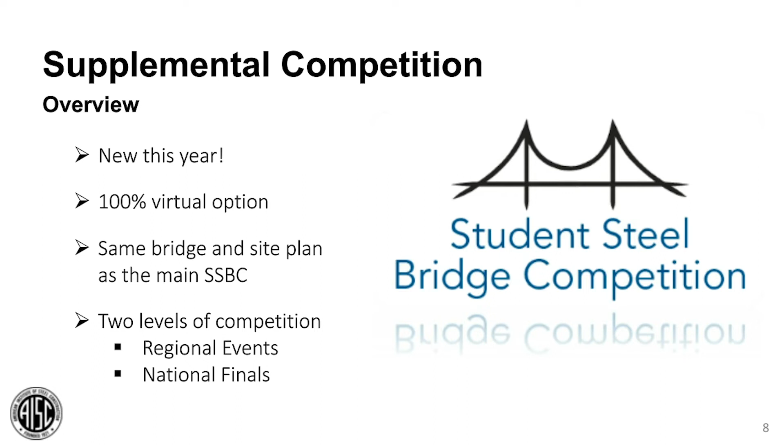I want to remind you and your team that you will need to pre-register by Friday, October 30th. Your team's faculty advisor can visit aisc.org/SSBC to fill out the pre-registration form.

Both sets of rules for the main competition and the supplemental competition are located on the same page at the aisc.org/SSBC website. This is also where you will find the official clarifications. If you do have a question for the Rules Committee, you will find a link on the right-hand side of the page to submit your question. The Rules Committee will provide a response that will be added to the clarifications for other teams to see as well.

As I mentioned before, the supplemental competition is a 100% virtual event, and teams are challenged to design a scale model steel bridge. You will be asked to develop a portfolio that will be judged by industry professionals, steel construction specialists, and members of academia. That portfolio will include a written report as well as a video, and together, those should show how your team's bridge design meets the client specifications and optimizes performance and economy.

There are 4 separate judging categories: the design portion, analysis portion, construction sequencing portion, and a video. We will take a brief look at these 4 categories, but I encourage you to read the rules in detail for all of the requirements.

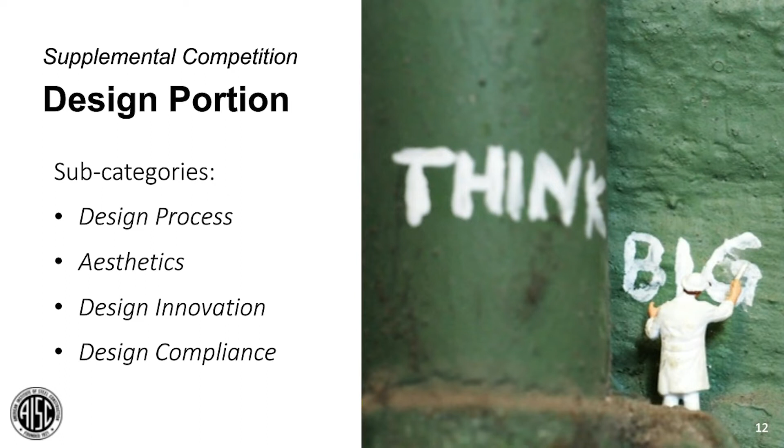First, the design of the bridge focuses on the objectives and constraints associated with the bridge's geometry, fabrication, and construction. A good design efficiently uses material, considers ease of fabrication and construction, and allows the structure to function properly under the expected loads. When reviewing potential options, aesthetics and innovation can also play a significant role. The design portion includes a description of the final design process and the principles used to select the final configuration. It should include things like the advantages and disadvantages of the selected overall design, an overview of any innovative features, and a discussion of the aesthetic appeal.

Structural analysis methods and software packages allow engineers and SSBC teams to predict the performance of their structures. However, in order for the analysis results to be useful, several engineering skills are required, including proper modeling techniques and assumptions, proper demands, consideration of things like geometric imperfections, structural stability, and loading sequence, and the ability to verify the results generated by a computer analysis.

So the analysis portion requires you to describe the analysis methods that you used, discuss the perceived limitations of the analysis, and provide a summary of the results.

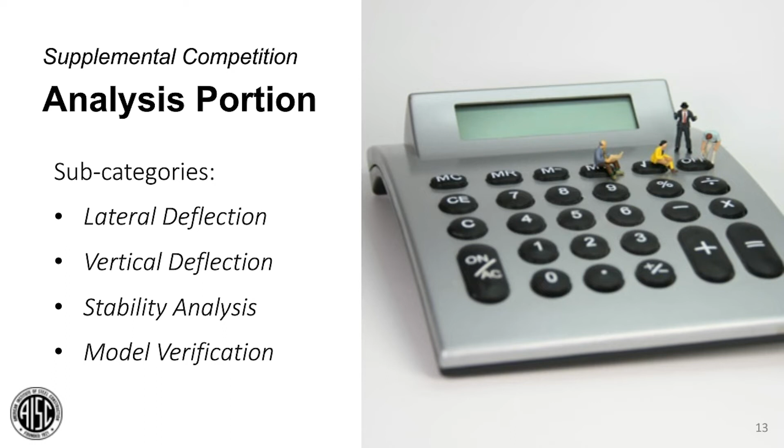Thinking about how a structure is constructed can be just as important as making sure that it can carry the loads. As designers develop their final design, they should consider the erection process and how things are put together. The construction sequencing portion should contain a description of the final construction sequence, as well as a description of the methods used to decide that final sequence.

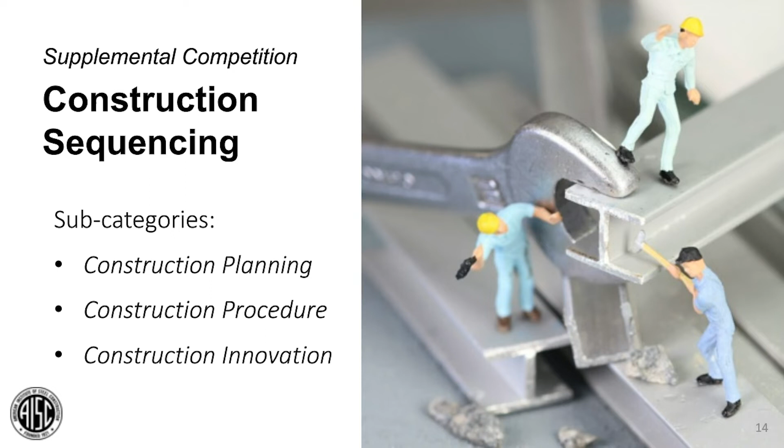And finally, the results of your final design, analysis, and construction sequence won't go very far unless you can communicate that information to your client. It is really important to be able to convey that final design to a client in such a way that is professional, concise, and informative so that they can understand and accept the work.

The video portion of the supplemental competition challenges you to create a brief video that is directed toward the owner who will be selecting the final bridge. We will not discuss the video in detail during today's webinar.

So at this point, I'm going to turn things over to our three guest speakers who will share their own strategies when it comes to assembling engineering reports. And we'll start first with design.

At this point, I'd like to introduce Jason Stiff. He obtained a PhD in structural engineering from the University of Texas at Austin after receiving both Masters of Civil Engineering and Business Administration degrees from the University of Kentucky. He is a bridge technical manager working for Michael Baker International in their Louisville, Kentucky office. To date, he has made significant contributions to several major bridge projects touching every stage of a bridge's life cycle, including the design of two separate 550-foot basket-handled network tied arches over Kentucky Lake and Lake Barkley. He has worked with the AASHTO NSBA collaboration, where he is the vice chair of the Steel Bridge Erection Task Group. Jason has assisted in numerous complex, long-span fracture-critical inspections, including more than a half dozen Ohio River bridges, and he has also been involved professionally with the development of a national standard for steel bridge design and analysis. He was awarded the 2016 National Society of Professional Engineers Young Engineer of the Year Award. Jason lives in Rineyville, Kentucky, with his wife Samantha and their 6 children.

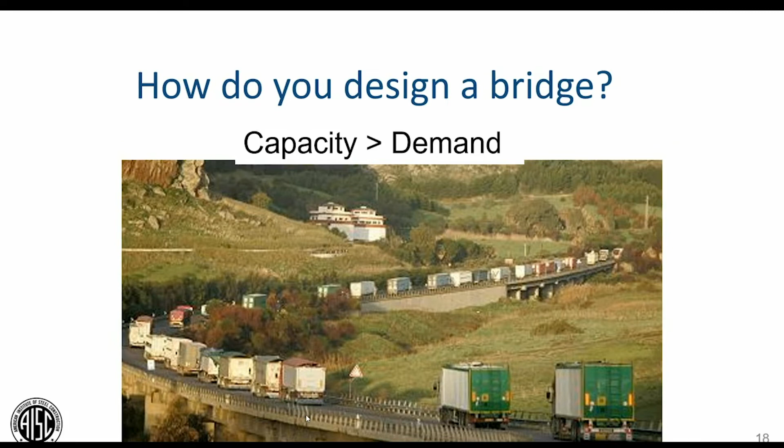So let's talk about designing bridges, and generally let's talk about design in general. For those of you who may be starting into this, design is quite simple, and it really doesn't matter whether it's a bridge design, highway, water, electrical, mechanical, anything. The simplest equation when it gets down to design, and really the only thing that gets down to design, is this very simple equation: the capacity has to be greater than the demands. So we're going to look at this equation of capacity and demands, but it really boils down to that simple. No matter what you do in engineering and in design, it has to come down to this very simple equation, and we'll write it in complicated ways and look at it different ways, but it basically boils down to this: the capacity of any member has to be greater than the demands that we're going to put on that member in order for it to be safe for the public.

I just want to make sure we have those terminologies in case it's used now or in your future. You've hopefully seen that terminology. So let's get back to designing a bridge.

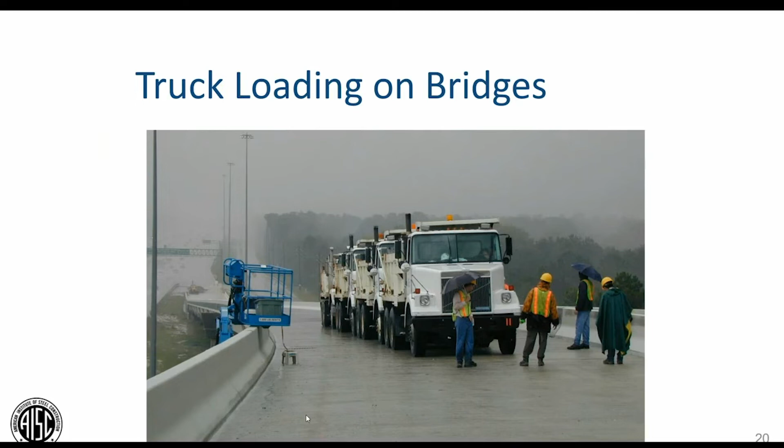For most of our highway designs and highway bridges, the things that matter are trucks. Trucks load up a bridge, and their weight has to be supported over top of a river, over top of another road, a railroad, or whatever obstacle we're trying to cross. Cars in general are light and relatively insignificant, so we can completely focus the design on a truck typically. For the steel bridge competition, they made it a little easier - you have a set steel weight and load that have to be handled. But no matter how you do it, you still have to get the loads from the point of application to the support.

That's called a load path, and you have to understand the load path of your bridge in order to design it. For our normal steel bridge design, we would design the deck in order to support the truck wheel weights, and the deck spans between the girders. Then, knowing the weight of the truck and the deck, I need to design the girders to support the weight of the truck and the deck above them. Then you go to the piers, which span and support the girders between them - you design those to support the truck, the deck, and the girders, plus their own weight. Finally, that has to get down to your foundations, which you design to support the truck, the deck, the girders, and the piers.

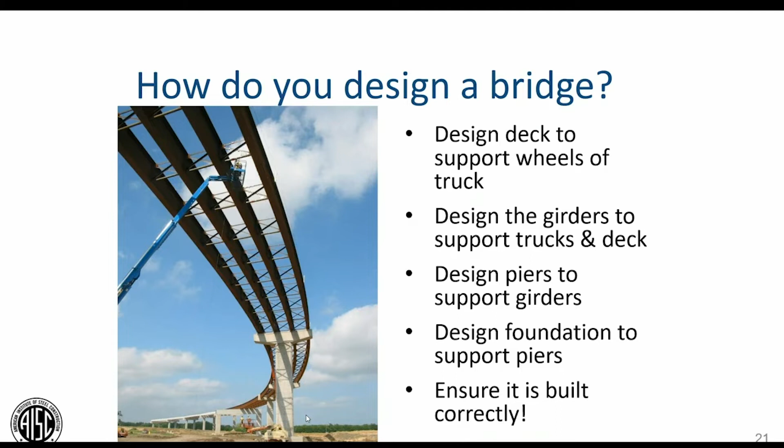So there's a load path that you follow from the point of application of the load through your structure to the point at which it hits your supports. And then, of course, finally you have to make sure it's built correctly. But this idea of load path is critical as you think through your structure and how you're going to support that load most efficiently and get it from its application to the supports.

So back to this equation, an equation of capacity versus demand. For every member, as you go through this load path, we've got to ensure that the capacity of that member is greater than the demands placed on it by the loads.

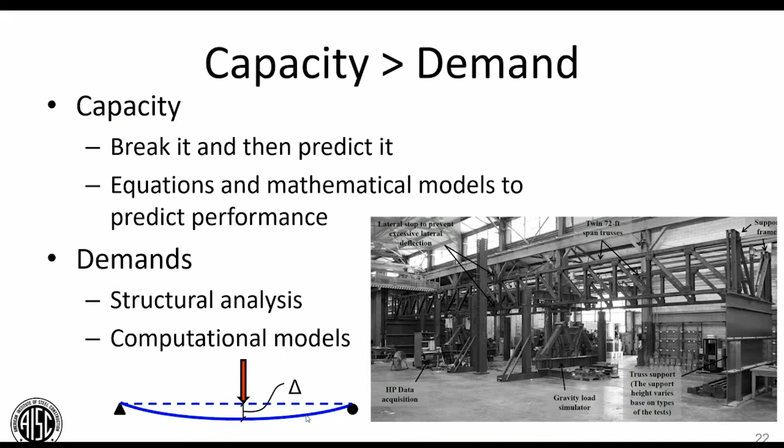The demand side of the equation is generally done by structural analysis, computational modeling, and that sort of thing. That section is what Christine is going to talk about right after me, but it follows along with it - they're two parts of the same coin. You have to know your capacities, you have to know your demands. So when I'm talking about capacity and design, I'm going to speak more toward the design side and capacity side of the equation, while Christine will be talking about the demands you apply to the structure.

As you go through, the most important thing to understand and think about - it's kind of a state of mind, because really it's code independent - whichever code you're using, they're all trying to check the failure modes. How can this structure fail? What are the ways in which it can fail? It could fail in tension or compression when it yields. If it's in tension, it could fracture. For compression, there's stability - this thing could buckle, like this bridge in New York did several years ago during construction. So if you know the failure modes, only one of these is going to control, because you may have a very high capacity for tension but a very low capacity for compression.

So obviously the compression one is what's controlled because of the lowest capacity. That's your controlling capacity in your capacity demand equation. So you have to figure out all the different failure modes. Whatever the least is becomes the capacity of that member, and we need to ensure that is greater than every demand.

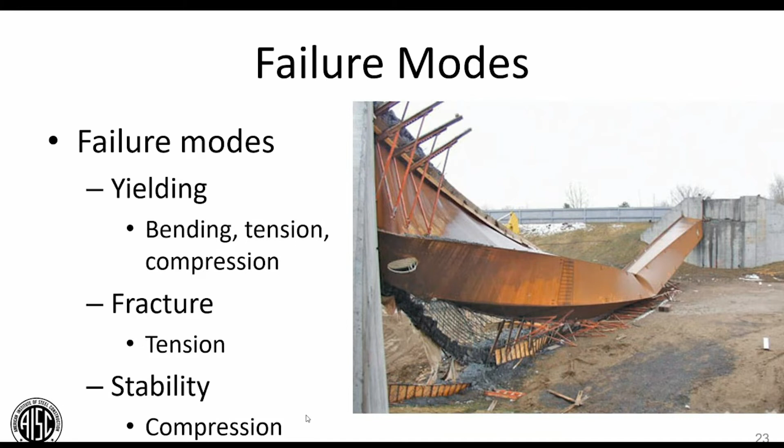Where can you get some of the information? Hopefully you'll have an opportunity to look in the AASHTO, the American Association of State Highway and Transportation Officials, LRFD Bridge Design Specification. It's really, I call it the Bible. It's the main book that we have to use within our bridge world. This has all of our requirements.

Like many of the codes you may see, it's a two-column code. There's a left column and a right column. The left column has the requirements. As you read it, you will see you shall do this, you shall do that, and it's written as the requirements of the code.

The right column is directly related to what is in the left column, and it's commentary. It recommends that you do this, you should do this. It gives you some, maybe historically we have done this, and some background and more ideas. It gives you references to other research and places you can find information to try to help inform your decision as to how you apply the code. And that's the way that works.

For our competition and for this, typically there are 3 chapters that are important. Chapter 3 is all about the loads, applying loads, and how you apply loads in bridges. Chapter 4 is about analysis, the analysis of bridges and the different types of analysis that can and should be done. And finally, Chapter 6 is the steel design, or the steel capacity equations, where you can figure out how to design members for different failure modes, and you work your way through that.

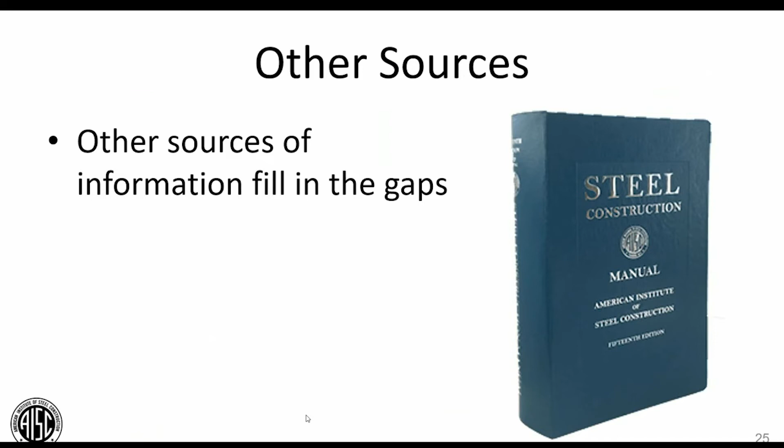Now, the AASHTO, or any code, is not all-inclusive. It's often important that you go to other sources to fill in the gap, such as the AISC steel manual. Even though it's not specific to bridges, it's still very useful and has a lot of good information that's worth dealing with and trying to capture.

Another really important aspect, and I think this will become important as you go through this process, is that everyone makes mistakes, and as you do this, you're going to make mistakes. Typically in school, as you do homework or an assignment, the teacher, your professor, is the one that actually does the grading. But once you get a job in life, your peers become your graders. So whenever I do a set of calculations, one of my coworkers will go through and check to make sure I haven't made a mistake. The consequences of failures in structures is too great to not do something like this.

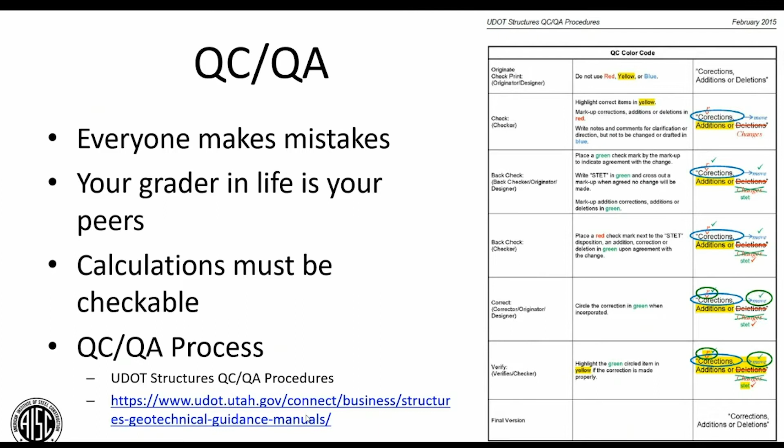It also means that as you do a set of calculations, you need to make them checkable. You need to write down the code reference: this is where I got this equation, this is how I'm doing it. All that kind of information becomes very helpful and useful as you go through there.

Some advice as far as writing it: typically, assumptions are really the most important things. You're going to have examples of your calculations as part of your appendices and things, but what are your assumptions? If somebody else comes up later, your coworkers or your grader, somebody picks this report up, can they understand what you did? What are the assumptions you made with regard to the geometry, the materials, what kind of materials you're planning to use, the loading, your design approach, your methodology? You need to make sure these are clearly spelled out within your report, so that someone coming along after you understands, oh, that's why they did this, this is how they got to this answer, they were assuming that. That's an important aspect of it.

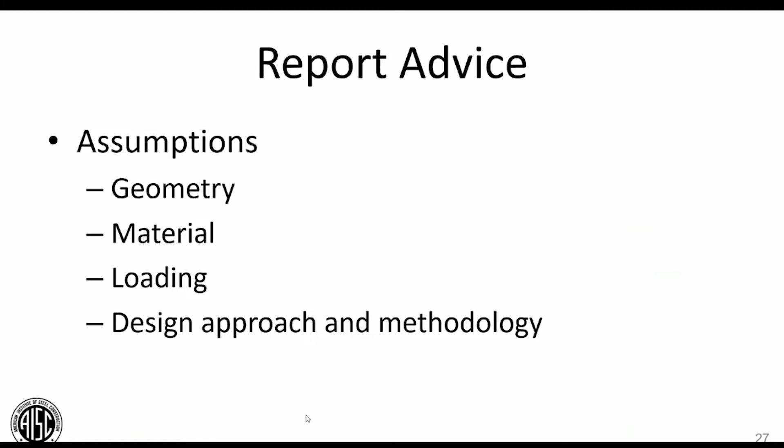They will see the effort you put in there and understand that you're trying to tell a story. In a set of calculations and in a design report, we often put pictures of the detail, put pictures of what we're trying to do, hand drawing showing the orientation of the forces, something like this, but something to explain what your ideas are. Oftentimes pictures and call-out boxes can catch the eye of the person checking it or reading it more than just straight text.

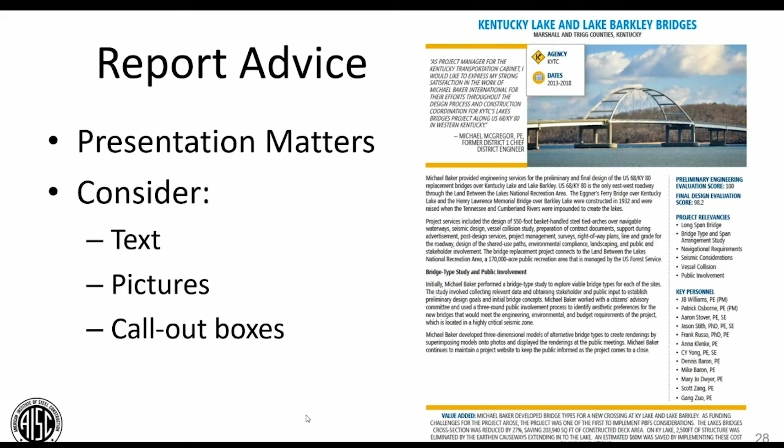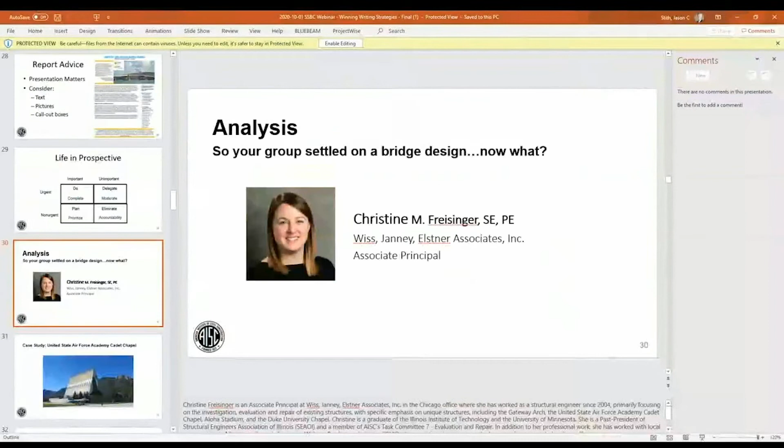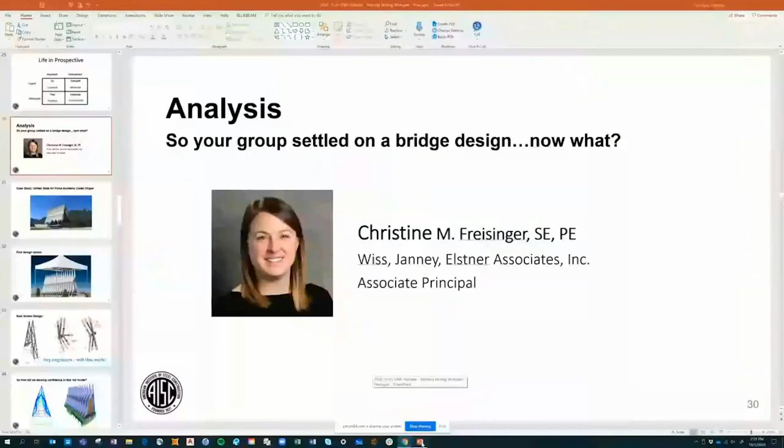All right, so while Chris gets her screen set up, we'll give her an introduction. Christine Freisinger is an associate principal at Wiss, Janney, Elstner Associates in the Chicago office, where she has worked as a structural engineer since 2004, primarily focusing on the investigation, evaluation, and repair of existing structures, with specific emphasis on unique structures, including the Gateway Arch, the United States Air Force Academy Cadet Chapel, Aloha Stadium, and the Duke University Chapel. Christine is a graduate of the Illinois Institute of Technology and the University of Minnesota. She is a past president of the Structural Engineers Association of Illinois, or SEAOI, and a member of AISC's Task Committee 7 for Evaluation and Repair. In addition to her professional work, she has worked with local communities in Nicaragua through Engineers Without Borders. And during COVID, she spent time learning to make homemade pasta and play disc golf.

So at this point, I'll pass it to Chris to talk about the analysis portion of the project.

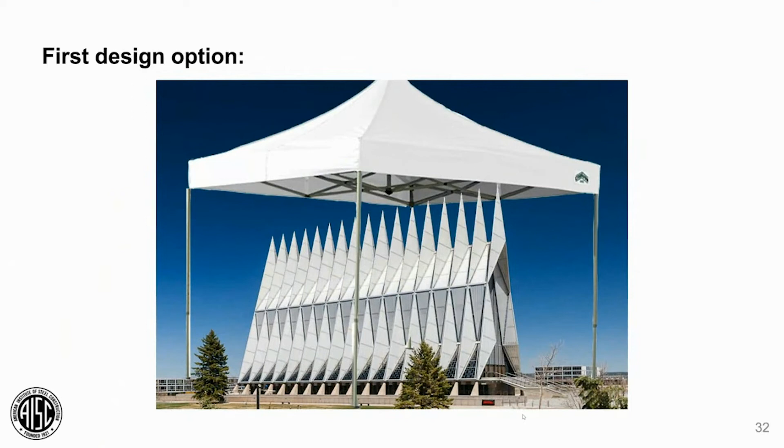So our first design proposed just to take away the water source. After a good laugh, we moved on to our second design option, which was designing a new rain screen with aluminum metal panels and new detailing between the joints that could hopefully perform better over time.

This proposed system ended up adding about 25% more dead load to the structure. So the architectural side of our design team wanted to know: will the existing structural steel be able to support the additional proposed loads, and what magnitude of deflections should we design the joints for?

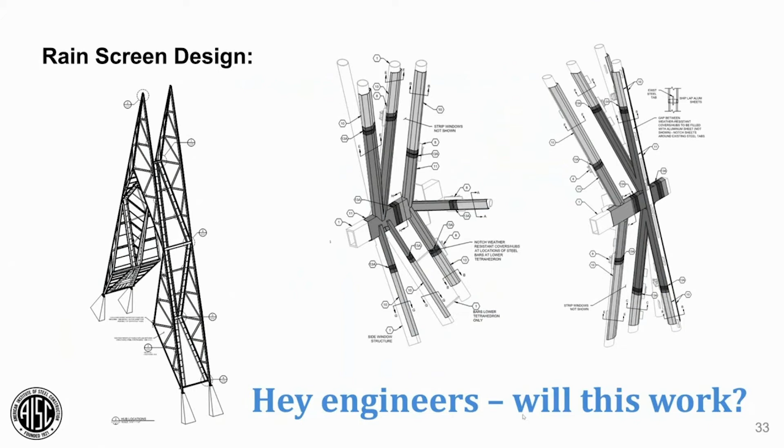So we can certainly build really cool and complex models in a variety of analytical software programs. They can check the numbers, they can get out deflections, and we can tell the rest of the team the answers that we've received.

And then if you're working in a team atmosphere, often the rest of the team says something like, 'Are you sure? Did we have this analysis reviewed internally? And is the calculation package ready to go to the independent peer reviewer?' Which, as Jason mentioned, you often have peers or colleagues reviewing your work as part of these design processes.

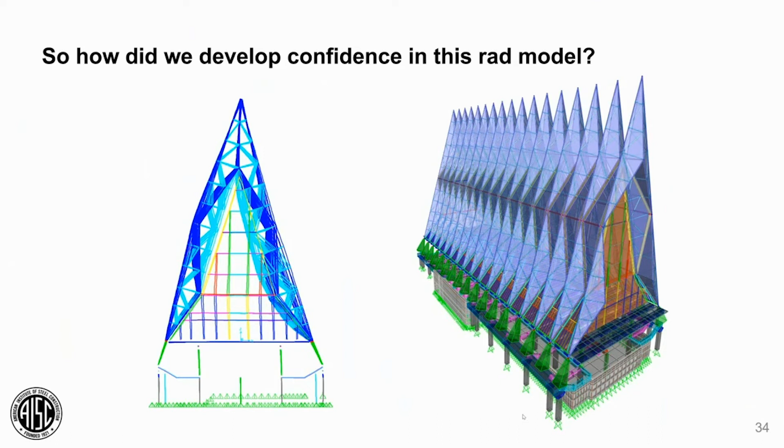So how can we take this really cool, complex model and distill the analysis down to a step-by-step process for another engineer to review, understand, and then discuss any conflicts in our base modeling assumptions, inputs, and outputs? Essentially, how can you convince the team that your analysis is sound?

So before you start modeling, there's a few things you want to keep in mind. As an analyst, it's your job to ensure that your mathematical model is realistic. It's entirely possible that you've built a valid model that runs, but the model doesn't correctly represent the structural behavior that you were trying to model. So the model doesn't need to look like the structure exactly, but it has to behave like the structure.

Oftentimes we're using post-analysis confirmation of the analysis results, and you're putting a lot of engineering judgment and critical thinking into looking at the results that your program is giving you, and deciding if that's the behavior you think you would be getting in real life or not.

So often a phrase to capture all of this that you may have heard already is garbage in, garbage out. So to convince yourself that the analysis is sound, and then to document the analysis, you need to make sure you understand the basic behavior of the structure that you're looking at. And we often break down unique structures into simplified models when we get started.

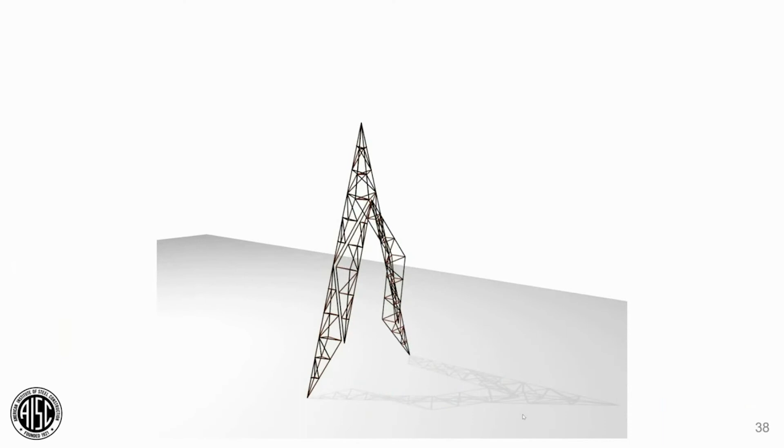So for Cadet Chapel, we can start with the tetrahedrons that form the structure. And if we tilt up just one of them, you could even just model one of these tetrahedrons, which is really just a 3D truss, to take a look at the local behavior. And then you could put a bunch of them together, and then you could analyze one bent of the tetrahedrons if you wanted to, and then replicate those bents out to get the entire structure.

So now that you have a model that runs, what's the difference between design and analysis? Design is what Jason was talking about - what does your structure or bridge look like? And then the analysis portion is what are the effects of the load on that structure, so how do you use your analytical model to calculate the demands on these members and get the deflections out?

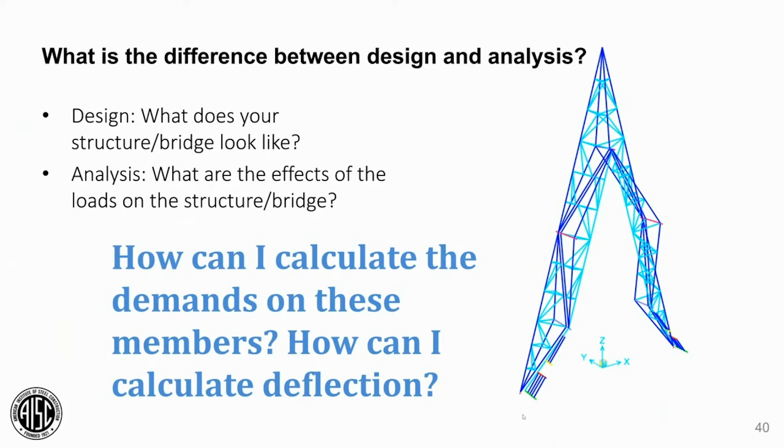As Christy mentioned, the analysis subcategory criteria includes a couple categories. When you're looking to answer these subcategory criteria, you want to be thinking really about how your model is behaving and how you're verifying that behavior, because those are the categories they're looking for. How are you confirming that your model is running accurately?

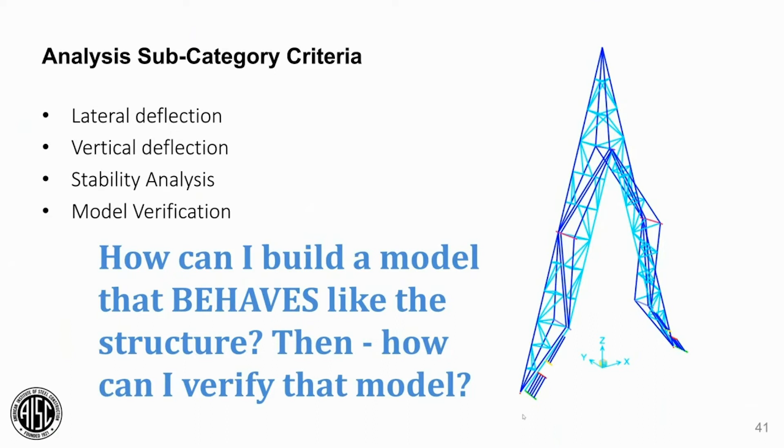So when you go through your model setup, a couple things to keep in mind when you get started are your overall model geometry. One tip is always to be checking your units. Usually these software programs can accept multiple units, and it's really easy to goof up a unit at the beginning and not understand the answers you're getting at the end. You also want to make sure you're giving some thought to your member sizes and material properties, as those will be important to estimate deflections.

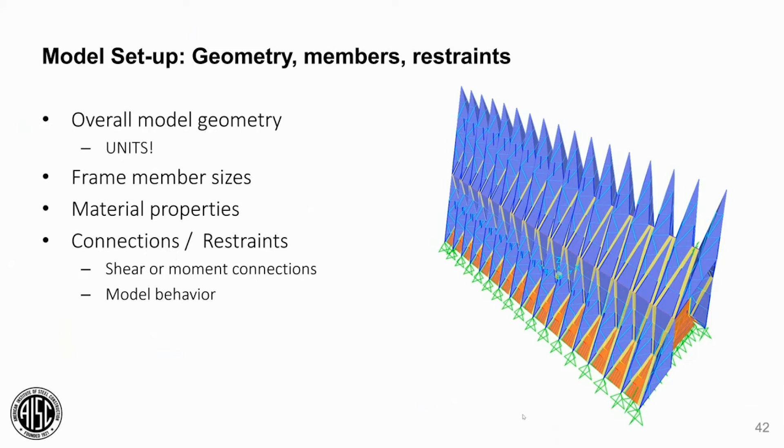And then give some thought to the behavior of your connections and restraints. You want to make sure you're providing enough restraint for the model to be stable, but an overly restrained model can give you poor results.

As you head into taking a look at your load cases and your load combinations, you want to be a little bit diligent about this. I often develop a matrix of loads and combinations in a simple Excel file before I get started. Sometimes if you elect to let the software program make the load combinations for you, there's often a lot of combinations, and it doesn't give you a good sense of which combinations may be controlling, especially if you're just looking at an envelope of the cases together.

And then you'll go on to usually checking your capacities. Most software programs are a really powerful tool that can calculate the capacity of the members for you. But to do this, the software often starts by making assumptions, such as unbraced length or interaction of loads. So it's prudent to be aware of those assumptions and update them when required for your behavior.

We also usually do hand checks of some of the highest stress members to confirm the software results. You can see in this overview of Cadet, we've got some members getting an interaction ratio of just about 1. So we would have taken the results of the analytical software and then also confirmed those by hand using the code checks to confirm what the model is outputting for us.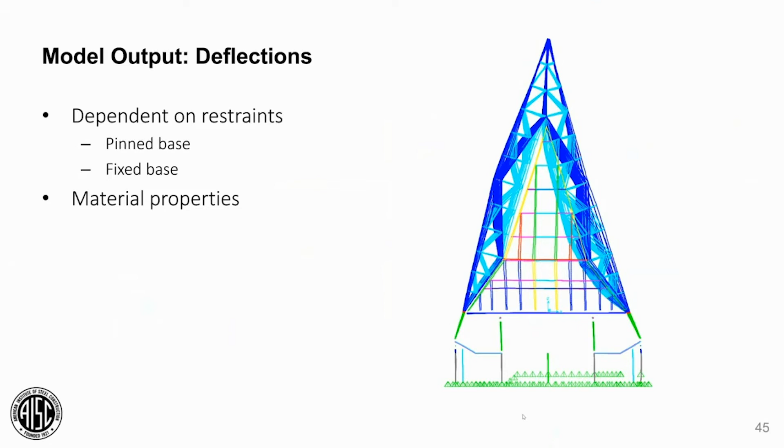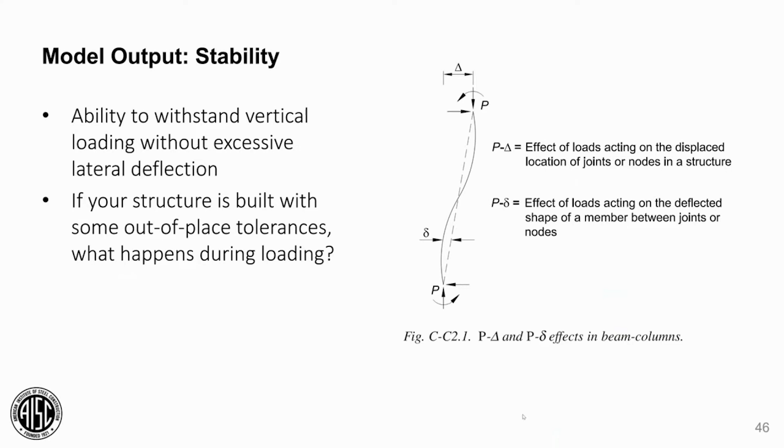Another thing to consider is the stability of your model. Many, but not all, modern commercial structural analysis programs are capable of accurately and directly modeling significant P big delta and P little delta second order effects. You want to make sure you understand how your software program is handling those effects and what is, and just as importantly, what is not included in that analysis and how you're verifying that for the programs. A lot of the software programs being used have verification examples, so you may want to check those to see how your software works and make sure those assumptions and runs are appropriate for the design you're working on.

As Jason touched on as well, there needs to be model verification completed. This is often referred to as a QC/QA program. A good program is a deliberate and systematic approach to reducing the risk of introducing errors and omissions into the design. The designer, the person making the model, often performs the quality control of his or her own work by establishing procedures for self-checking the work for accuracy. And then the reviewer is practicing QA, and they're responsible for independently checking the work of the designer to assure the correctness and meeting the design requirements and expectations of the project.

So it's usually a 2 or 3 step process. You're checking your own work, and then someone else on your team is checking that work and in more of a global view. And then in this case, the third reviewer is going to be the AISC team.

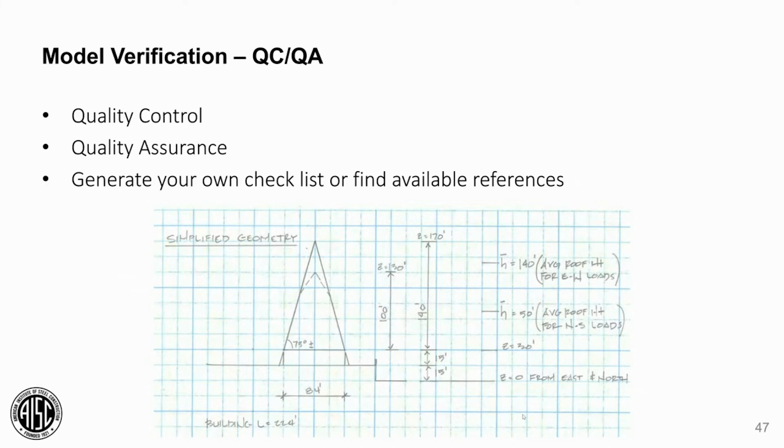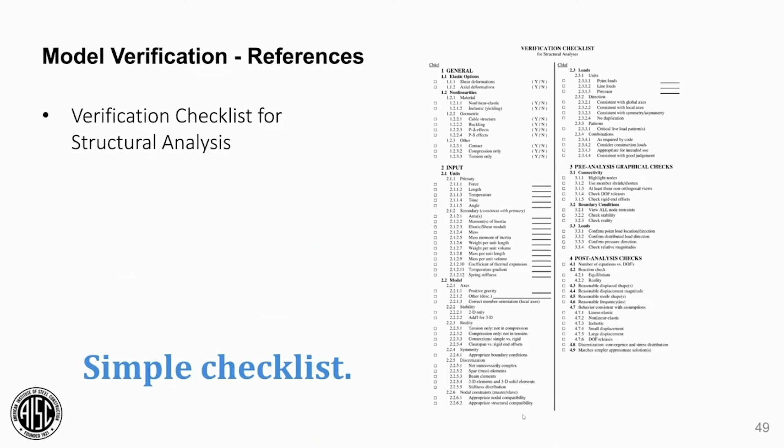You can also go to a more complicated checklist. This one gives an example of some inputs, modeling considerations, loads, and then also some post-analysis checks, which we talked about at the beginning.

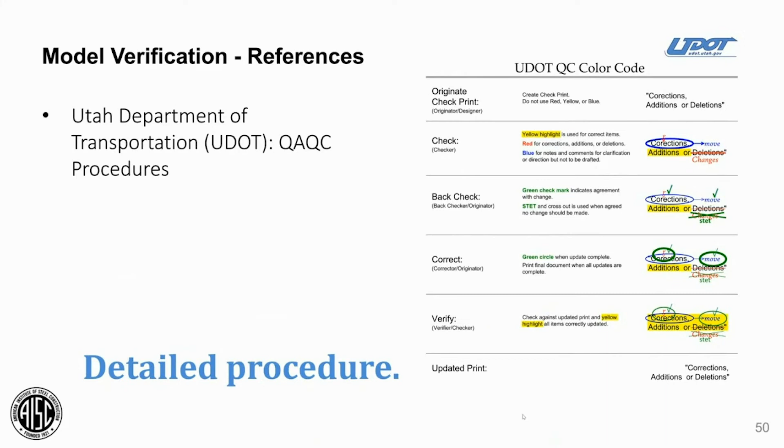Is your analysis giving you reasonable output, and is the behavior consistent with what you're looking at in real life? As Jason mentioned, you can go to a really detailed procedure, which is what the Utah Department of Transportation has on their website. So there's a wide variety of things you can do to verify your model.

When we're putting together model verification packages, we're usually looking at hand calculations that confirm the analysis input. So we're doing some quick hand checks to make sure we've got all the loads in the model correctly, and then we're doing hand calculations to confirm the overall structural behavior.

A couple slides ago, you saw some overall wind analysis on the structure. Your calculation submittal is really going to outline all of this together. We often put it together kind of like a book, right? We've got a table of contents, then each of those chapters digs into a specific topic you're looking to verify. This lays everything out very clearly for the reviewer so they can follow your thought process and the path through your analysis.

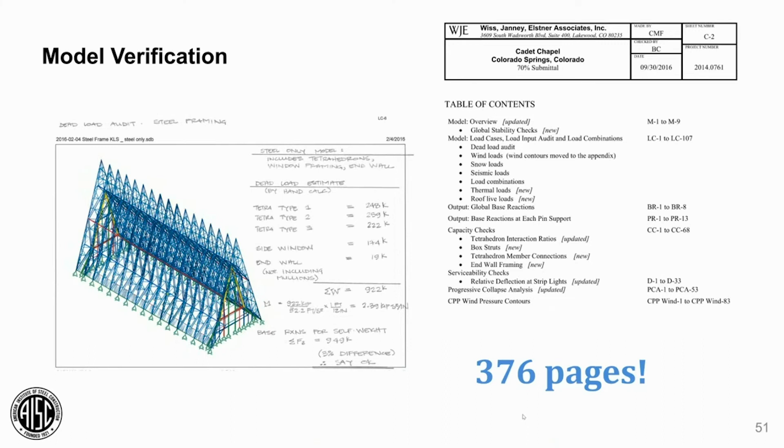And you want to be really clear. Jason had also mentioned you want to mix and match text and photos. You kind of want to be as clear as you can possibly be to make it as easy for the reviewer as possible.

So with this analytical portion of it, you really want to keep in mind the phrase garbage in, garbage out. Your data going in could be good data, or it could have some errors in it, and then through your modeling, maybe the program's making some assumptions you don't realize. You want to be careful about all that, because you really want quality input, quality software program run, and then output that matches what you're looking for in terms of real life behavior of your bridge. So with that, I will pass it off to Leo.

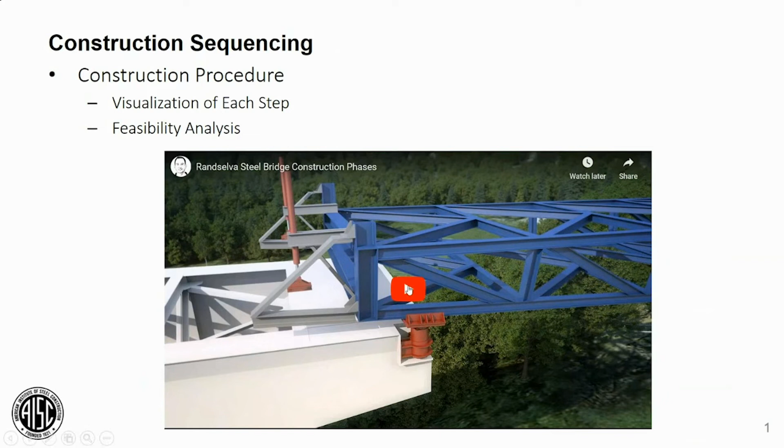So now that you've gone through the design and analysis of your bridge, let's go into the construction sequencing. But before that, let's get started with a video. This is a bridge in Norway—the Randselva steel bridge, which shows the different construction phases. It's a 3-minute video, and we're going to walk through it.

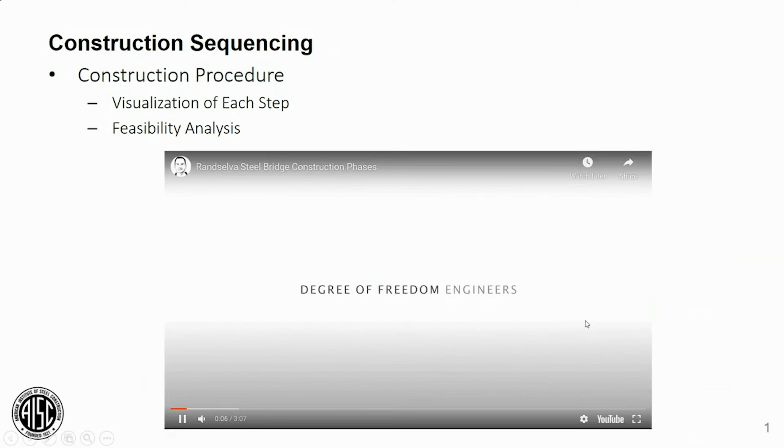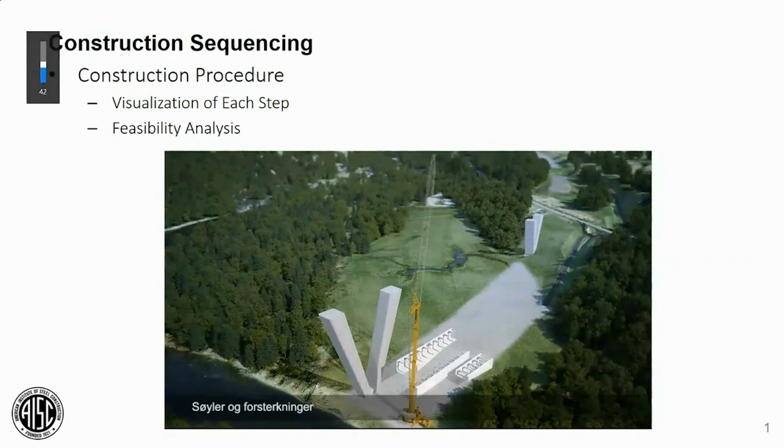One of the advantages of technology these days is that we can do some 4D visualization of what we're trying to build. So here, as you can see, this is a 4D visualization, starting off with showing the project site, understanding your constraints, figuring out where you're going to have your laydown area, where you situate your cranes.

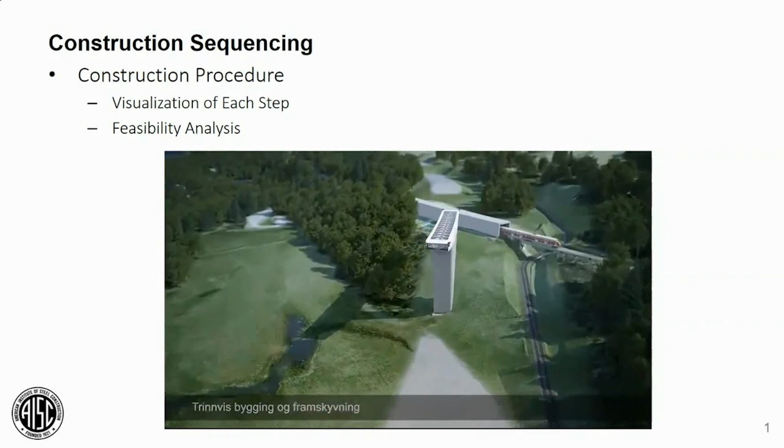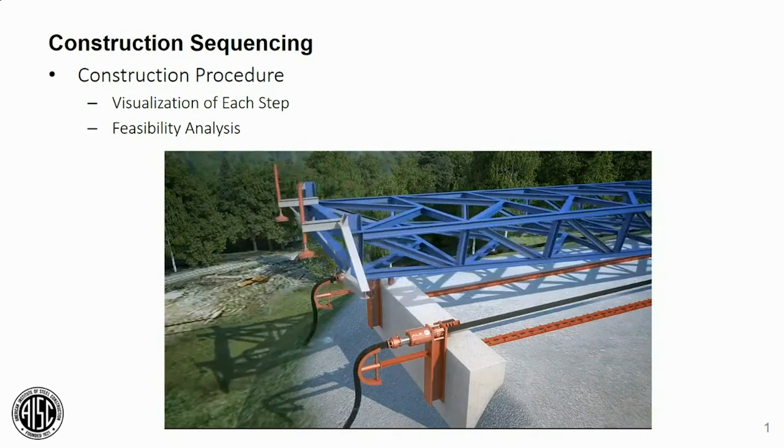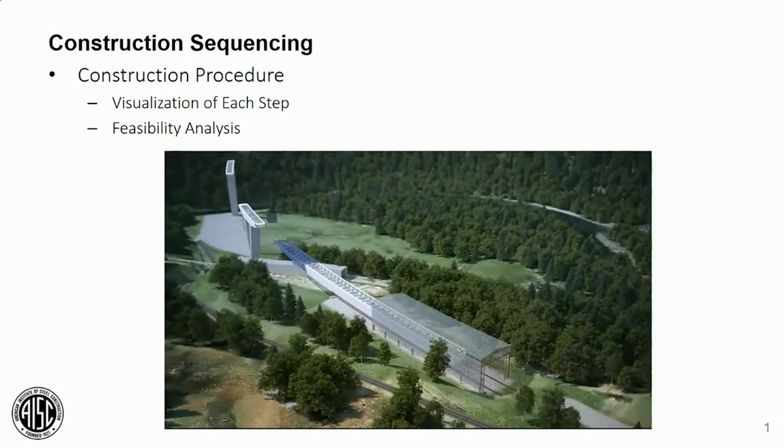And then after that, understanding what can I do to build my bridge, but at the same time satisfying the constraints that are out there. In this bridge in particular, as you can see, it's probably in a protected area, so you cannot just do construction all over. So what the engineers designed here is a gantry system. This is what's shown in blue right now, where it's launched from the approaches of the bridge out to the piers that were already built prior to that.

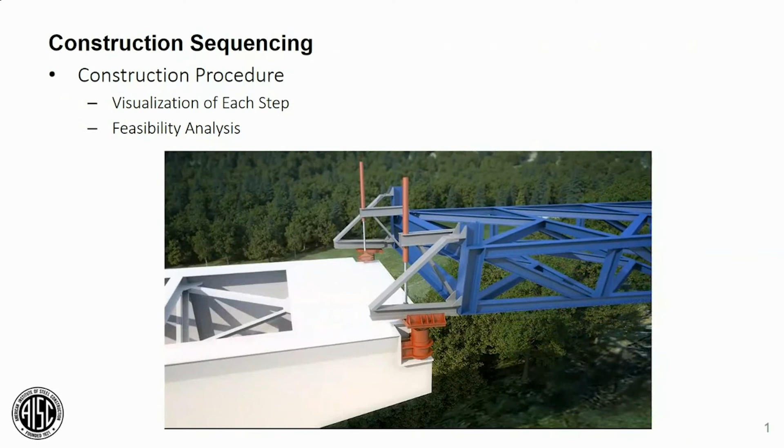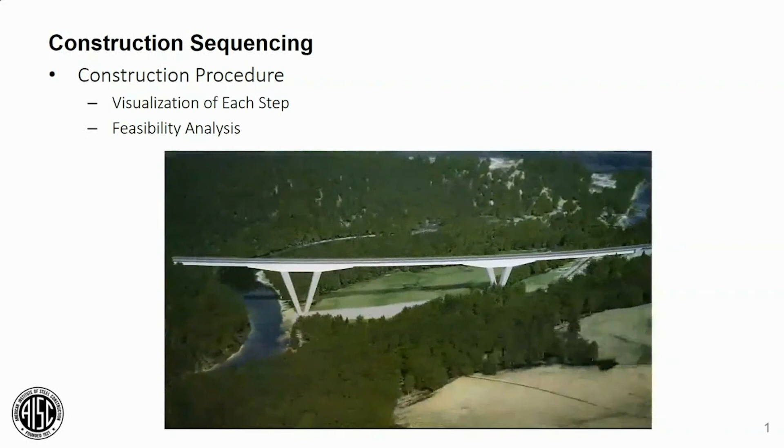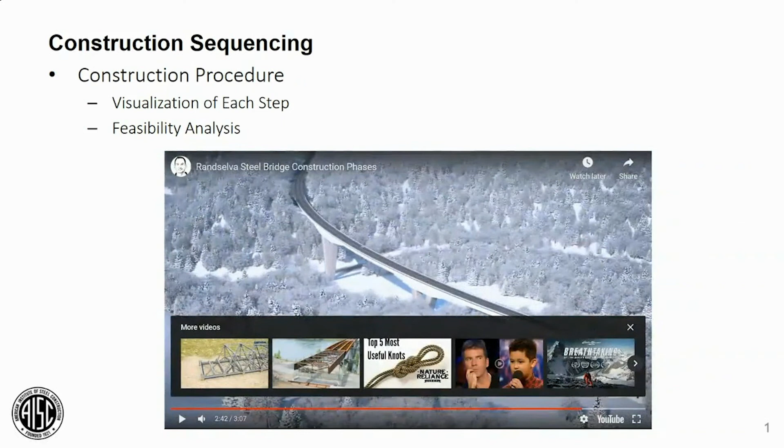So this is a perfect tool that allows you to visualize each step of your bridge construction. It also allows you to understand the feasibility of the different steps, or what you'd call a constructability analysis—can I do this, what can I do and what I cannot do. As you can see, once the superstructure and substructure are set, then you could just work on the deck of the bridge. That's it—quite a nifty tool to be able to visualize your step-by-step construction procedure.

Now, as Christy mentioned earlier, with the construction sequencing section of your report, we will look at your construction planning. What are the types of connections? What's the number of builders? What's the efficiency of your sequence? What are the potential challenges? And what's your total construction time? It all starts off with, as I mentioned before, understanding your constraints and your limitations.

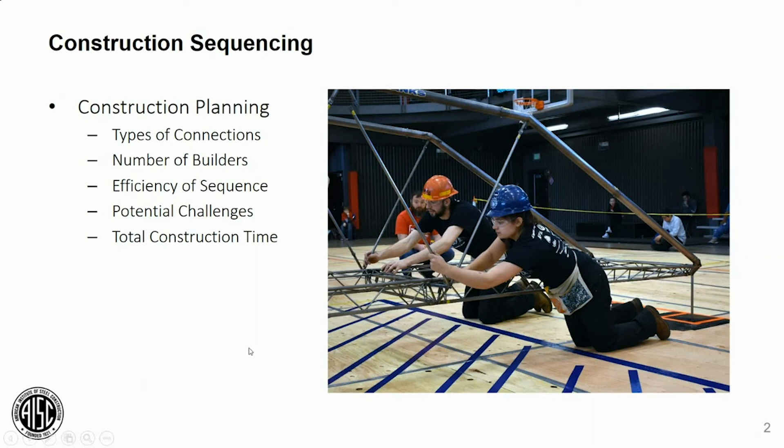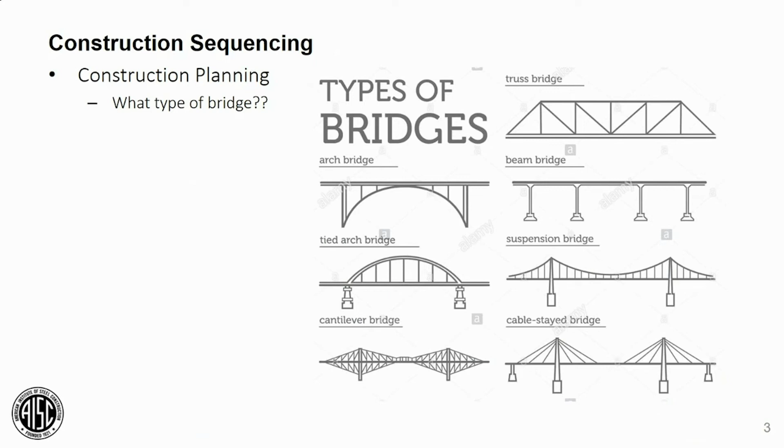Once you figure out your constraints and limitations, now you have to figure out what type of bridge you're going to build. Is it going to be an arch bridge, a truss bridge, a beam bridge, a tied arch bridge, a suspension bridge? For steel bridge competitions, it's typically been the beam bridge type, the truss bridge type, or sometimes even the bowstring truss type of bridge.

Once you figure out exactly what type of bridge you're going to build, then you can start figuring out what type of connections and number of builders you may have. In the real world, what we have to deal with are our stakeholders—you either have architects or public agencies that have a say in how your bridge is going to look. Here, in this theoretical steel bridge competition, really it's your call to figure out what type of bridge you're going to build to satisfy the different requirements set in the rules.

In terms of construction sequencing, what really is behind construction planning, especially in the real world, is what we call the critical path method, or CPM. This activity-on-arrow diagram boils it down to the basics of the critical path method. You have a start and a finish—on a global scale, the start of building your bridge, and the finish is when you're done with your bridge.

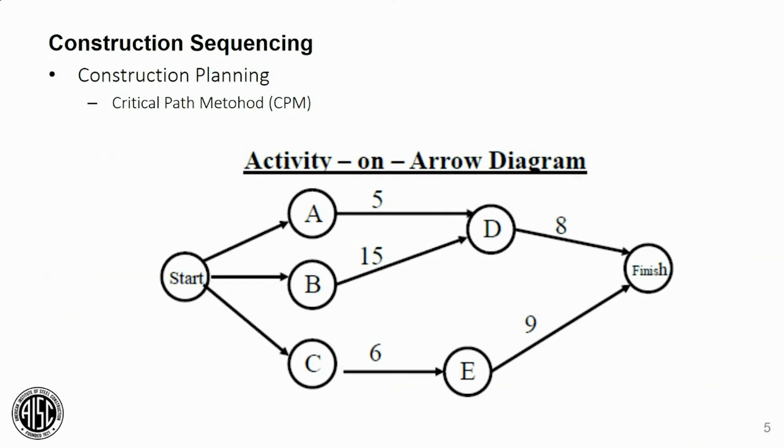And of course, there's different software available now in the market. In the industry, what we call CPM scheduling is the critical path method schedule. You have Primavera, Microsoft Project, and other tools out there. You can even go as basic as using an Excel spreadsheet to do your CPM scheduling.

This is what we're going to look into in terms of your report, how you create your work breakdown structure or your subtasks to build your bridge. You start off with your substructure, then you go to your superstructure, and then you boil that even further down into the different elements that need to be connected. You figure out how long it'll take to install specific members of your bridge, and also what types of connections you're going to use to make it a more efficient construction.

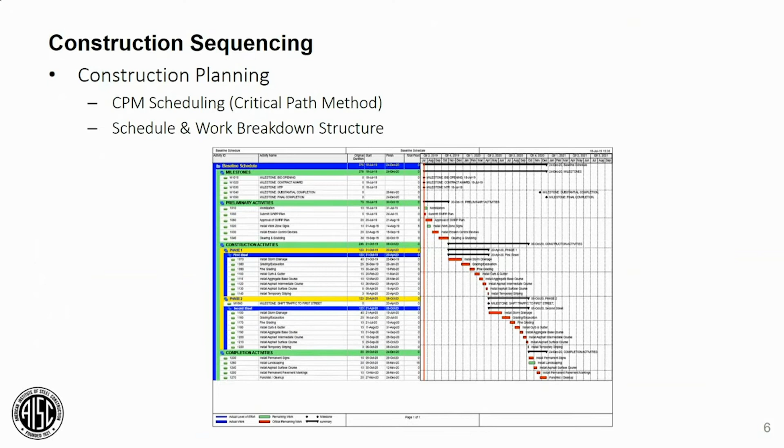And so everyone on this call has probably been to IKEA before. This is an example of an IKEA furniture called Billy. IKEA actually does a really good job visualizing the different step-by-step processes you have to go through to build this bookshelf, the Billy bookshelf.

So as per the guidelines, this is what we're looking for from you as well. The challenge of this competition is that, contrary to your normal steel bridge competition, you have to visualize things as opposed to having the go and green signal to fabricate things. You have to visualize it and then create diagrams for it so that if you pass this document to someone, engineer or not, they will also understand how to go from point A to point B. So keep that in mind. Good drawings and good graphics help your report.

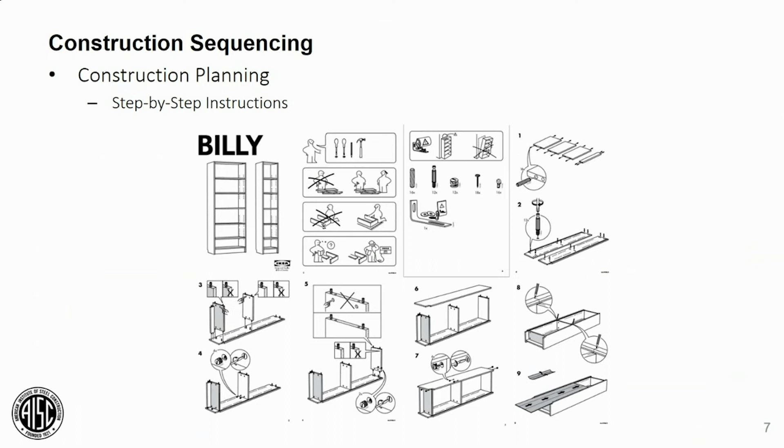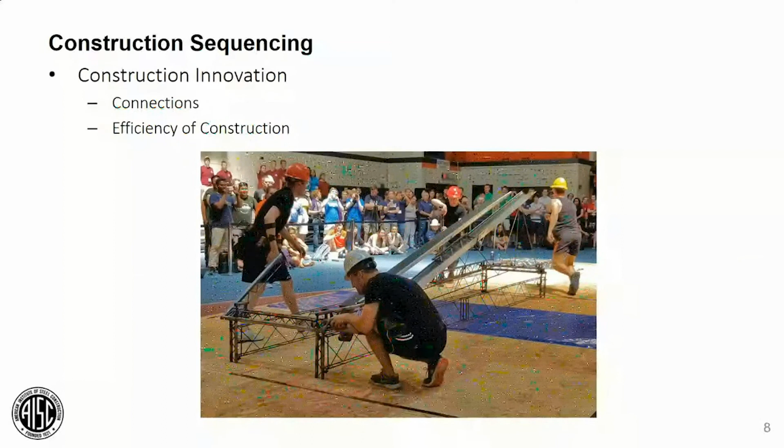So we're looking for innovations in terms of your constructability, but of course, also innovations in terms of your design. What type of connections do you have? Is it going to be a pin connection? Is it going to be a bolt connection? Anything that would make your bridge unique, and a component that helps you build the bridge faster or make your bridge stronger.

So we're looking for you to innovate in terms of these elements as well. In terms of construction innovation, once you introduce innovation into your design, it results in two main things: time and cost savings, which in an actual steel bridge competition will help you a lot, and enhancement of the performance of your bridge in terms of its capability to carry the required loads.

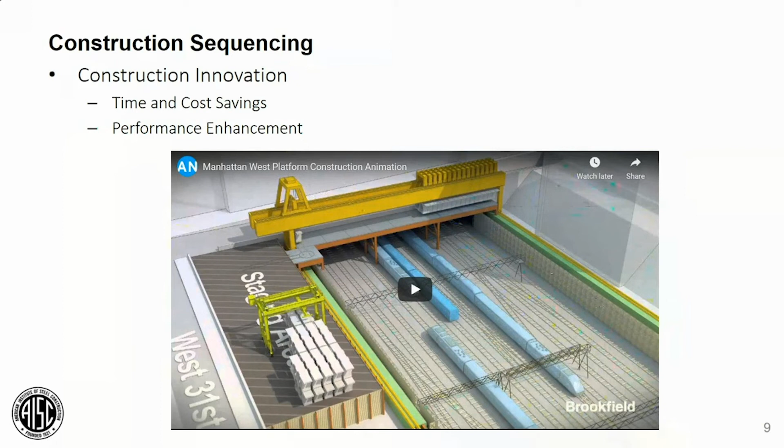I'm going to show you a video. This is by Brookfield Properties. This is a project that Thornton Tomasetti was part of, called the Manhattan West Platform Program. This is in New York City, along the west side of New York City. If you've been to New York, it's just west of Penn Station. It's over a rail yard.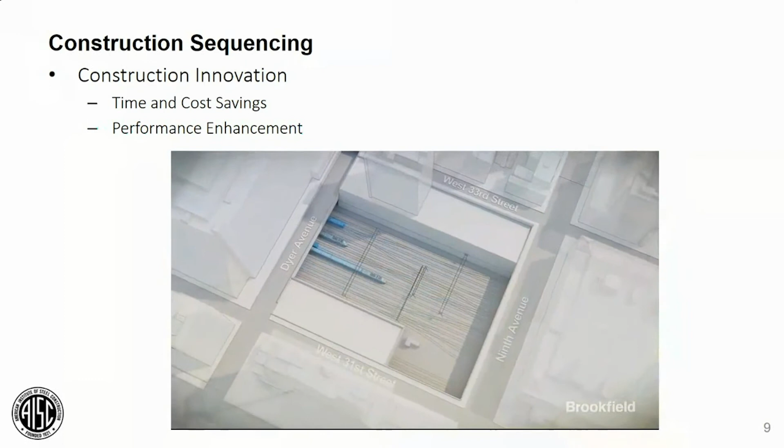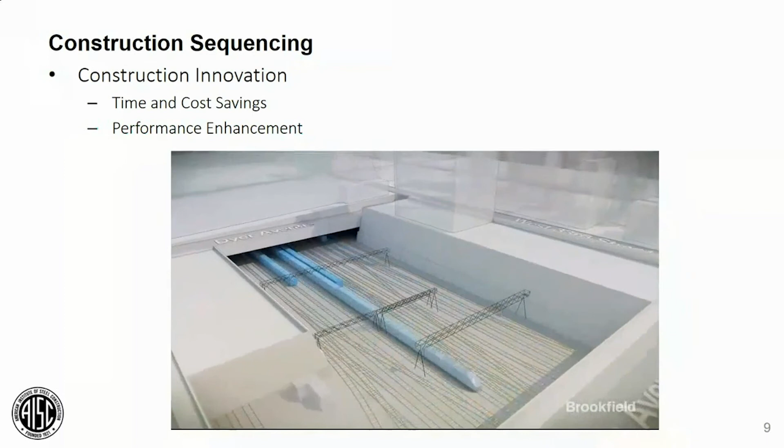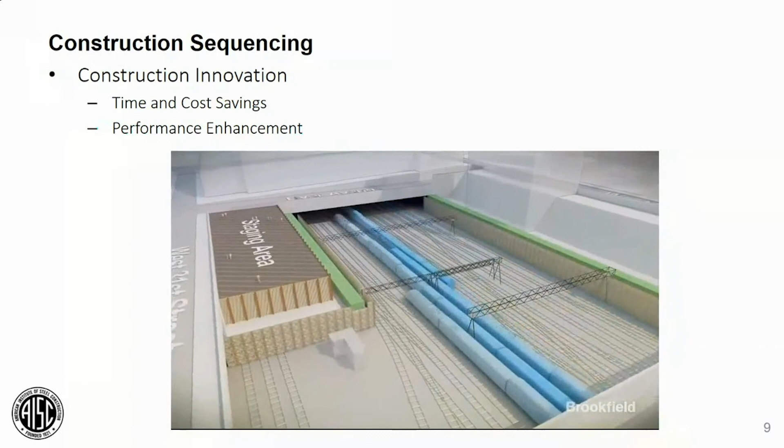And so the constraint here is that we need to build what we call an overbuild deck, in other words, a glorified bridge over this active rail yard, served by Amtrak and Long Island Railroad. And so with this 4D visualization, we were able to figure out how can we do this. Of course, we're going to take advantage of the sides of the site, the adjacent properties. How can we take advantage of that? In this case, the idea was to build this temporary gantry.

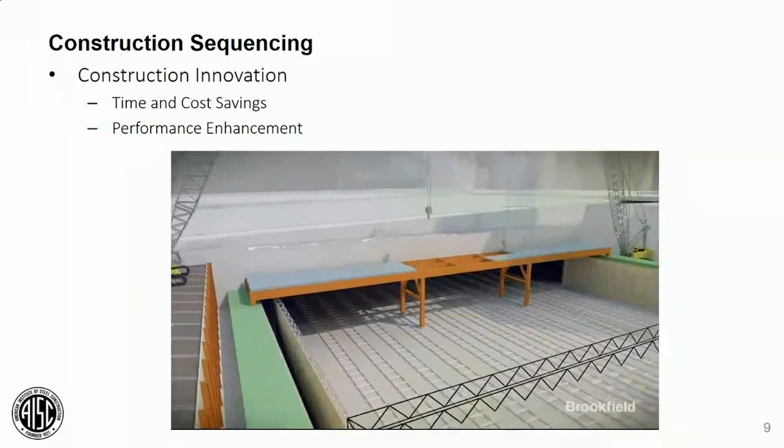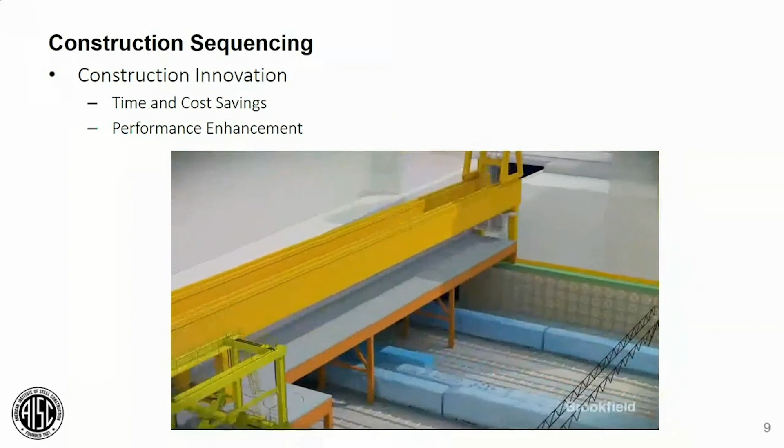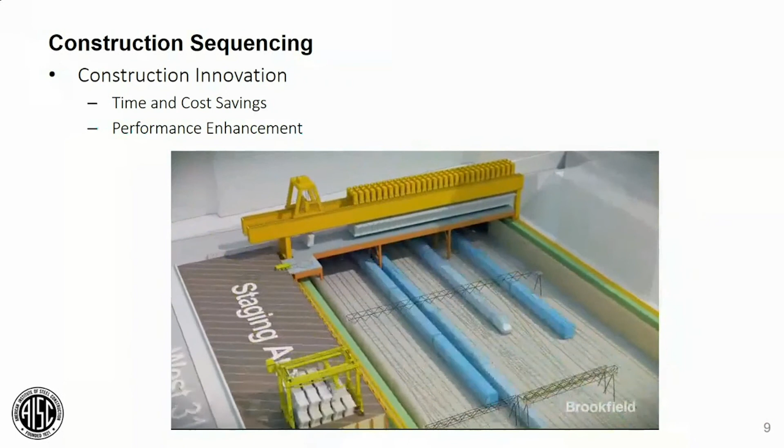In this case, this is a precast concrete type of structure, precast concrete segmental type of bridge. First, we installed all the temporary structures so you're able to create this moving gantry along the rail yard. So here now, as you can see in yellow, this is the launching mechanism that will take one piece of the bridge to the gantry, and just like pieces of Lego, we move it to the other side, pick up another, move it to the other side, and these are put together using what you call tendons, so they're post-tensioned, and in compression all the different segments are put together.

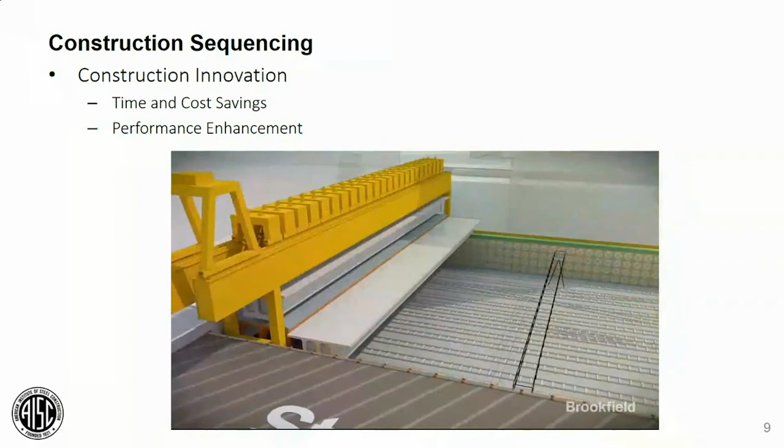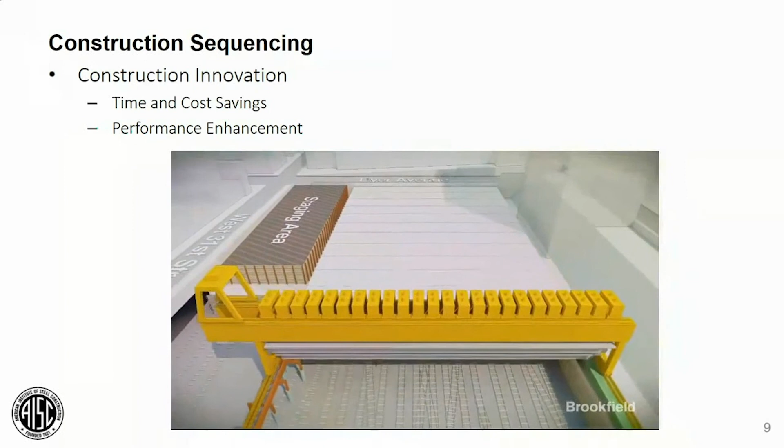And then once you put all these segments together on top of the bridge, now you have one span, and you just drop that down one after the other until you're able to complete what you call the deck overbuild on top of the rail yard. So this is one innovative way we came up with that helped us build these bridges, maintain service for Amtrak and Long Island Railroad along the way, and achieve the goal toward the end.

So this is what we're looking for, essentially, on a theoretical side on your end, once you figure out how to design and how to build your steel bridge. Great. And with that, I'm going to pass it back to Christy.

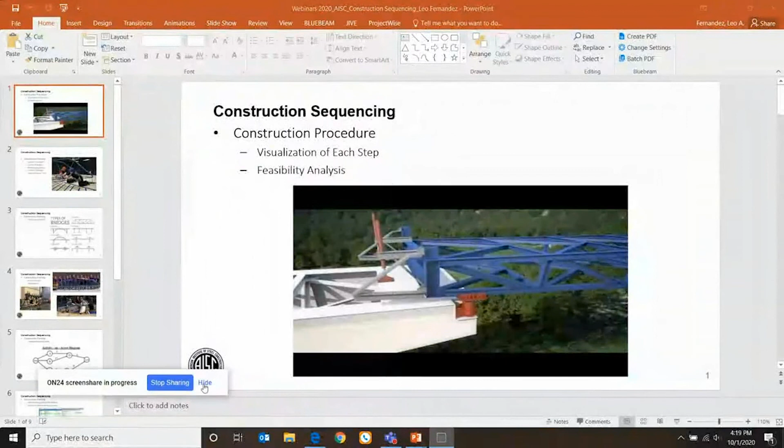So what does this partnership mean for you? It means you will have the opportunity to get connected with a structural engineer in your area to provide mentorship and guidance for your team, which could be particularly helpful as you prepare your analysis report.

We have developed a list of contacts with the help of NCSEA, so you can visit this new page: aisc.org/SSBC-NCSEA. There's a full list there of the local contacts for each of the 44 member organizations. You can reach out to the point of contact in your area closest to you for more information and to have a conversation about how they could potentially mentor your team.

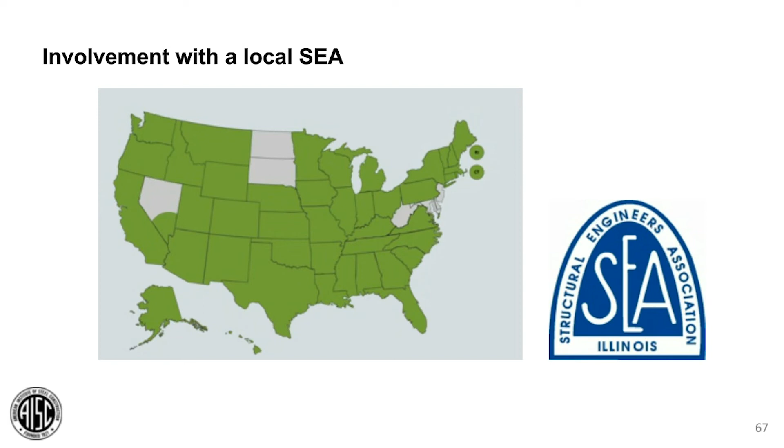Thanks, Christy. So as Christy mentioned, NCSEA is an organization of member organizations. Structural engineering associations are members of NCSEA, and then us as structural engineers are members of the state organization. NCSEA has 44 members, and some states like California break out even further into a couple different regions. So hopefully you have an SEA either in your state or in a neighboring state that you can link up with.

SEAOI, the Structural Engineers Association of Illinois, gave me opportunities to give back to my profession above and beyond what I would have been capable of doing on my own. At the time I was in undergrad, IIT, the Illinois Institute of Technology, didn't have a student chapter yet, so I wasn't introduced to SEAOI until I started working. I was encouraged to attend SEAOI events by my mentor as a way to get to know fellow engineers within Chicago. He noted that while we are not often working directly with other structural engineering companies on our projects, we can connect through our professional organizations and act together to advance our profession.

Around 2008, I was at an SEAOI event and said to a fellow female, well, there are so few women in our corner of the industry, why don't we just know them all? The two of us started the women's networking group within SEAOI, and this group has grown into a Women in Structural Engineering Committee, referred to as WISE, which now has chapters across the United States.

So I really enjoyed my time with SEAOI as a committee chair, and then ended up applying for the board of directors and eventually found myself on the executive track to become president, which wrapped up last year.

Through my involvement, I was able to participate in the renewal of the structural engineering practice in 2019 for the state of Illinois, which involved meetings with our Department of Professional Regulation and working with fellow professional groups, including AIA and ISPE, to align our professional acts. I was also involved with the structural work group to introduce the long-awaited IBC-based Chicago Building Code.